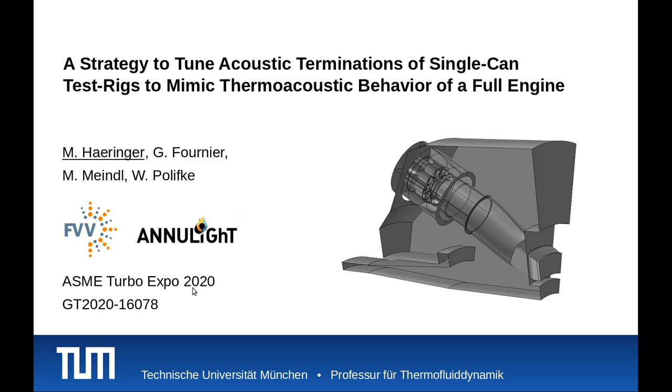Imagine the following situation: we are in the late design phase of a new can-annular combustor, and before we put the combustor in operation we want to do an extensive test campaign. However, building a full-scale test rig is typically too expensive, so we typically study the performance of the combustor with a single can test rig, as shown here.

This test rig comprises one can and the corresponding sector of the compressor exit plenum here, and the transition piece towards the first turbine stage here, also called annular gap. It is well known that with such test rigs we can test local phenomena like emission levels or flame stability.

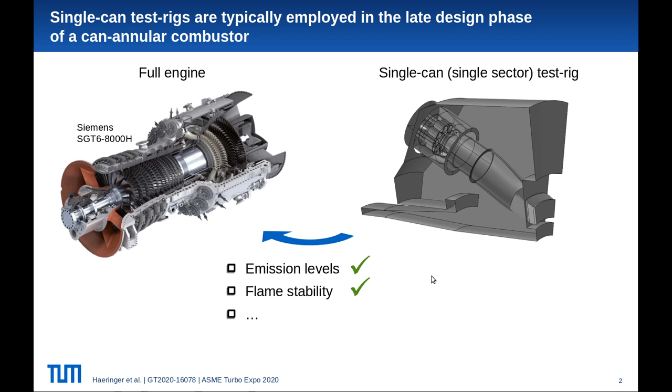However, the question that we want to address here is: can we also use our single can test rig to explore the thermoacoustic properties of the full combustor, which is also a very important point to address in this development stage.

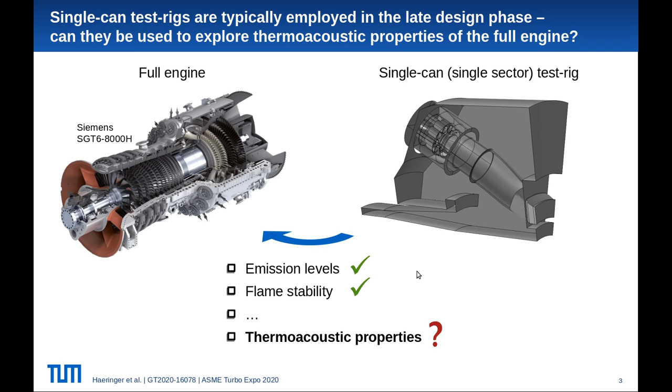To answer that question, let's look at the problem on a schematic level. In the full can-annular combustor, the individual cans are coupled acoustically via the compressor exit plenum and the annular gap in front of the turbine. This gives rise to azimuthal modes that extend over the entire circumference of the combustor and involve all the cans simultaneously. In our single can test rig, however, this coupling is not present.

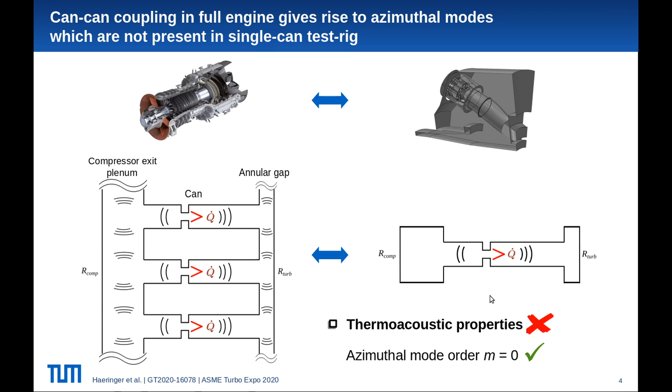Therefore, these azimuthal modes are not represented, except the axial mode with the azimuthal mode order m equals 0. Thus, the answer is no, we cannot directly use single can test rigs for investigating thermoacoustics of the full engine. The question addressed in our study is now: can we somehow tune the test rig to still use it for thermoacoustic investigations?

To answer this new question, let's first consider some theory. Typical can-annular combustors feature a discrete rotational symmetry. According to Bloch-wave theory, which was originally developed by Bloch in 1929 and which was first applied in the thermoacoustic context by Mensah et al.

In 2016, the full combustor can be represented by one single sector, while at the cutting interfaces here, so-called Bloch boundary conditions are applied. Now if we compare this to our single can test rig, except for those Bloch boundary conditions here, the full engine is actually identical to our single can test rig.

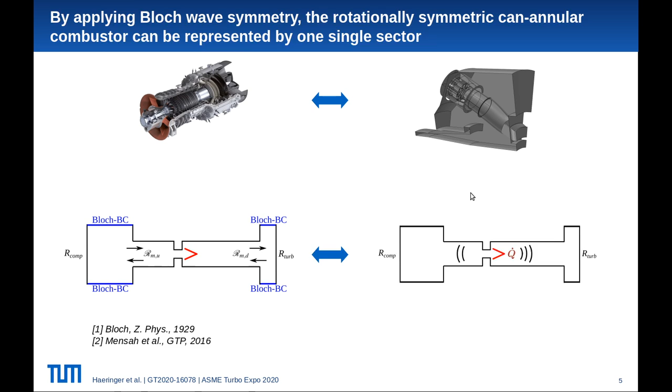We now define some equivalent reflection coefficients at the inlet and outlet terminations of the single can, so in the full engine and in our test rig. We know that if and only if these reflection coefficients defined at the inlet and outlet of the can are identical in the full engine and in the test rig, both systems will show identical thermoacoustic properties.

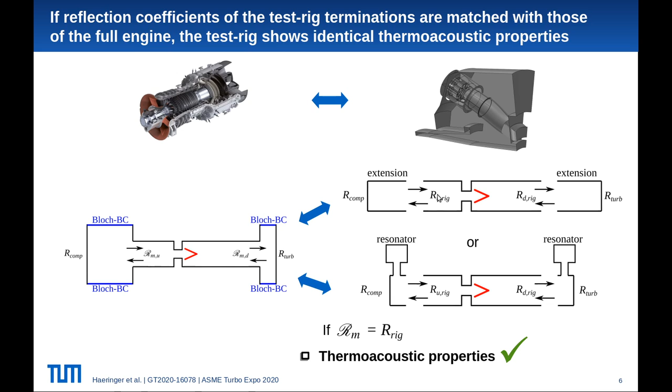We therefore have to somehow tune the terminations of the single can test rig in order to mimic the effect of those Bloch boundary conditions here. In the present study, we investigate the capabilities of passive acoustic elements to do this tuning, namely duct extensions and Helmholtz resonators. Those are used to match these equivalent reflection coefficients of the full engine and the single can test rig.

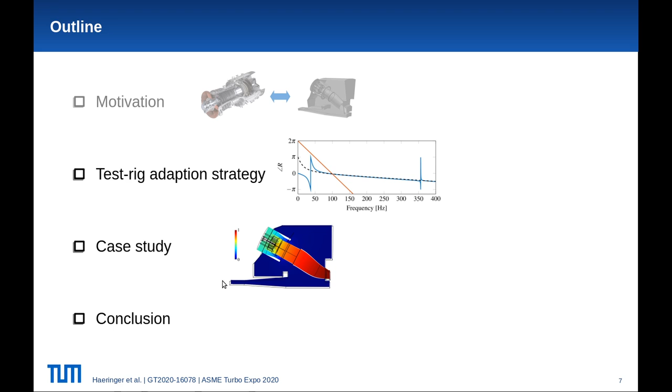In the rest of the talk, I will first present a strategy for tuning the mentioned passive acoustic elements in order to match the equivalent reflection coefficients. Afterwards, we apply this strategy to a numerical model of a representative can-annular configuration. And in the last part, a short conclusion is drawn.

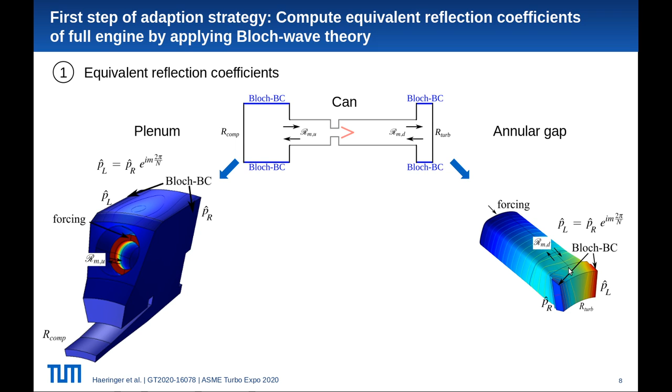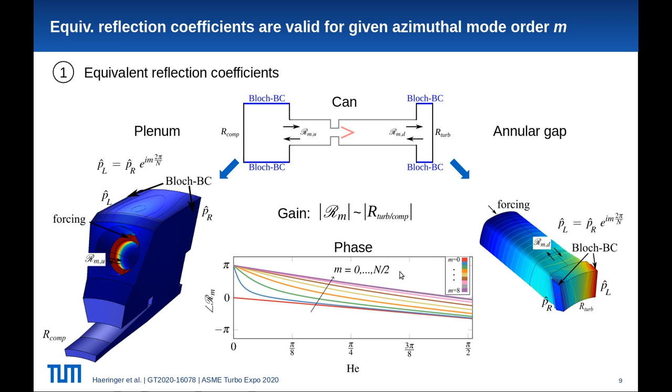What is important to note here, due to the Bloch boundary conditions, we get individual reflection coefficients for each mode order m. N here is the total number of cans, so in total we get N/2 plus 1 individual reflection coefficients.

In general, the reflection coefficients will only match at one distinct frequency f0. This is therefore called the design frequency of these elements.

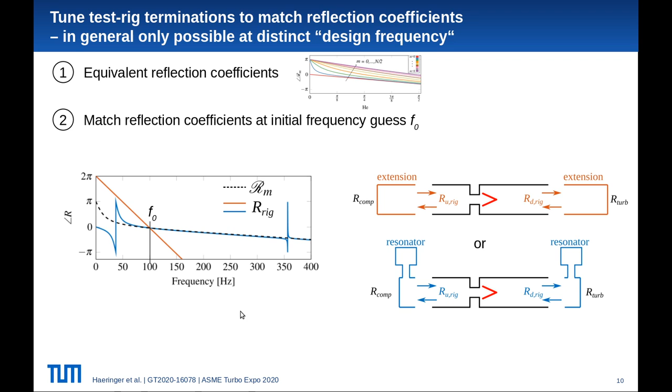As we cannot match the reflection coefficients for the entire frequency range, the reflection coefficients at least have to match at the dominant frequency of the full engine at the investigated mode order m. So only if the design frequency equals this dominant frequency will the test rig show the same thermoacoustic properties. However, this dominant frequency of the full engine is not known a priori.

We may only provide a good initial guess by, for example, taking the dominant frequency of the previous mode order, or that of the axial mode m equals 0, which can be measured in the unmodified test rig.

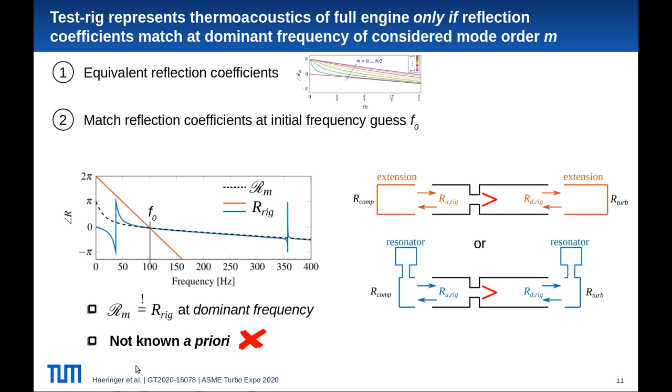We therefore propose an iterative adaption process where the test rig is successively operated, its dominant frequency is measured, and the tuning elements are adapted or redesigned accordingly. As shown in our paper, this process ensures that the dominant frequency of the test rig converges to the dominant frequency of the full engine at the considered mode order m.

After this convergence is reached, the stability properties of the tuned test rig and the full engine will also be identical, and the test rig therefore represents the thermoacoustic behavior of the full engine at this particular mode order.

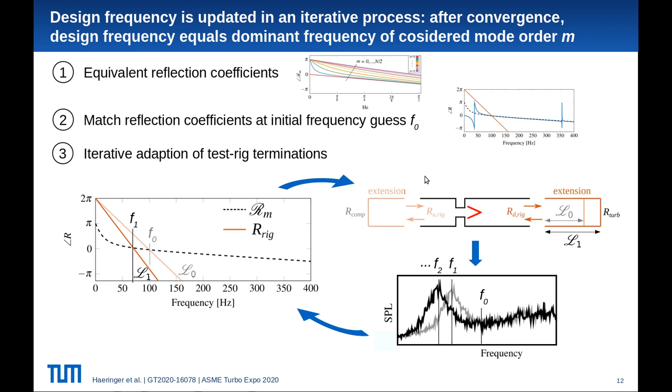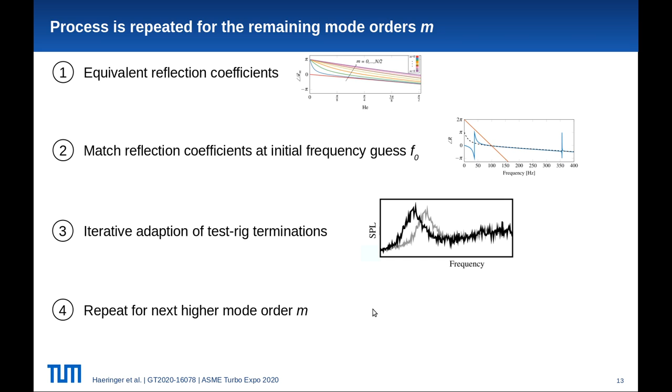This was the procedure for one single azimuthal mode order. These steps are now repeated for all remaining mode orders of the full engine. In this way, we can successively explore the thermoacoustic properties of the individual mode orders of the full engine using this tuned single can test rig.

This makes it possible to investigate entire operating windows with possibly changing dominant frequencies without the need of redesigning the elements. Additionally, its design parameters like the neck length or the neck area ratio should be remotely accessible, which is actually a huge advantage in a high pressure test rig.

Last but not least, the finally obtained resonator geometry is expected to fit in existing high pressure cells. On the other hand, the duct extension lacks all these advantages and is thus considered to be not practical. Thus, in the following case study, we will only consider Helmholtz resonators for test rig tuning.

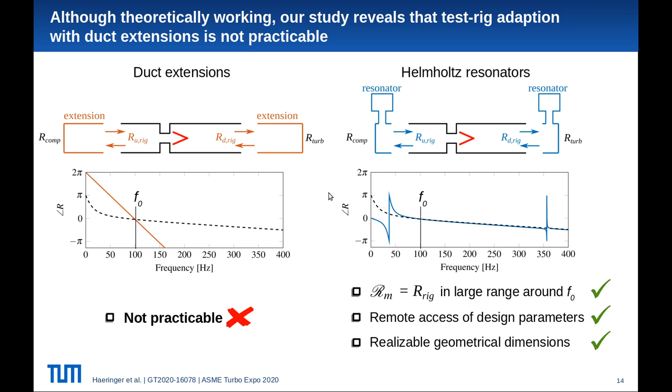The proposed strategy is now applied to a numerical model of a representative can-annular combustor. The case is modeled using the 3D inhomogeneous Helmholtz equation, and the flame response is modeled with an FTF multiplied by a generic saturation model. The FTF and the saturation model are taken from two studies here.

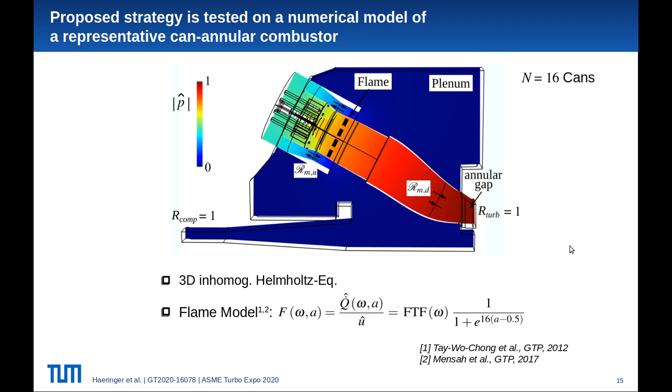This is due to the huge area change between can and plenum, which essentially decouples can and plenum. This indicates that can-can coupling via the plenum is relatively unimportant.

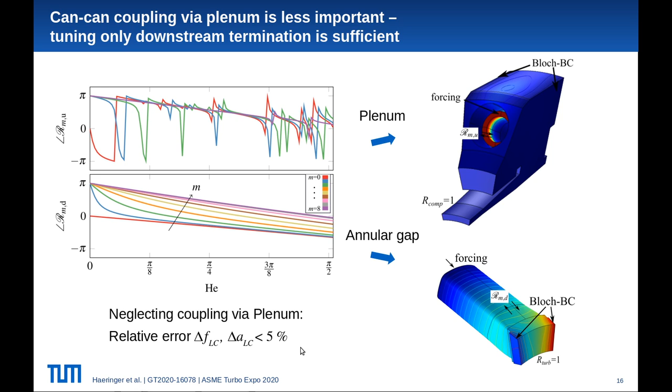The resulting limit cycle frequency and amplitudes for this downstream-only coupled case are less than 5% different from the fully coupled reference case. Thus, we can apply the adaption strategy only on the downstream side without significant loss of accuracy.

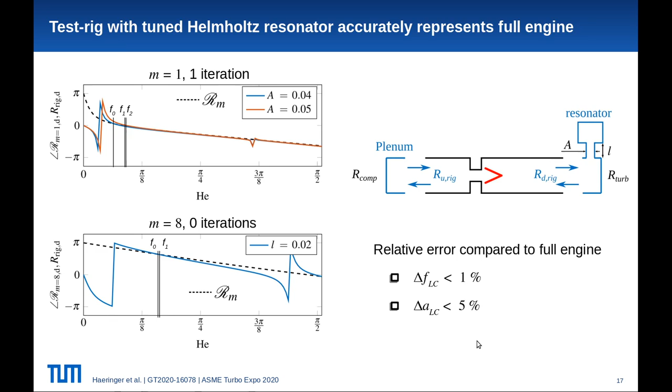With this slide, I want to conclude my talk. So we proposed a strategy to adapt general passive acoustic elements for tuning single can test rigs acoustically, and we showed that Helmholtz resonators are actually a very good candidate for this test rig tuning.

The strategy was then applied to a numerical model of a representative can-annular configuration. There we could show that can-can coupling via the plenum is relatively weak and might be neglected. Finally, we proved that our adaptation strategy is working with good accuracy, and it's also efficient.

However, this was only shown in the study with numerical models, while the strategy is actually intended to be applied in an experimental test rig. Therefore, experimental validation of the strategy is still missing.